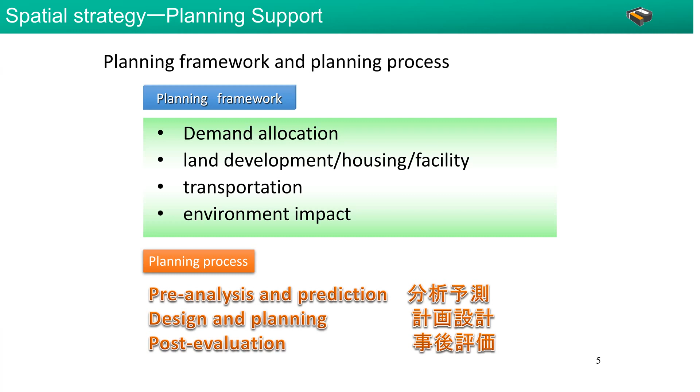My thinking for urban simulation is like in Japan, where we call the planning process the planning framework. We start from economic demand allocation, then turn to land development, including housing and public facilities. Then people occupy the land parcels, and they will have transportation in urban areas, and they will cause some environmental issues.

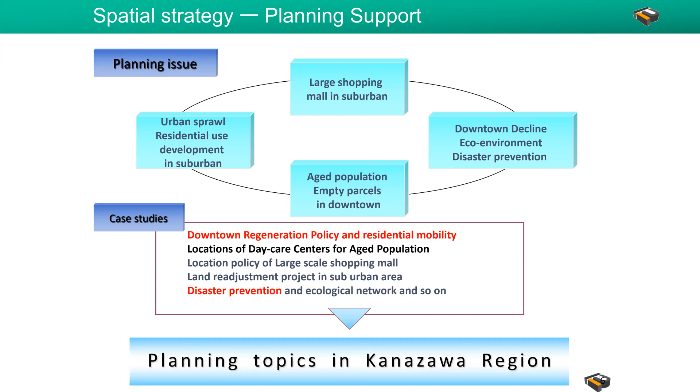In a local city in Japan, like Kanazawa City, they start from urban development - what we call urban sprawl - developing business areas outside in suburban areas. Then in the downtown, they will cause urban decline issues, with most population leaving downtown areas. So there's a process I show here: starting from urban sprawl and urban decline, and also downtown revitalization - this is quite an important topic.

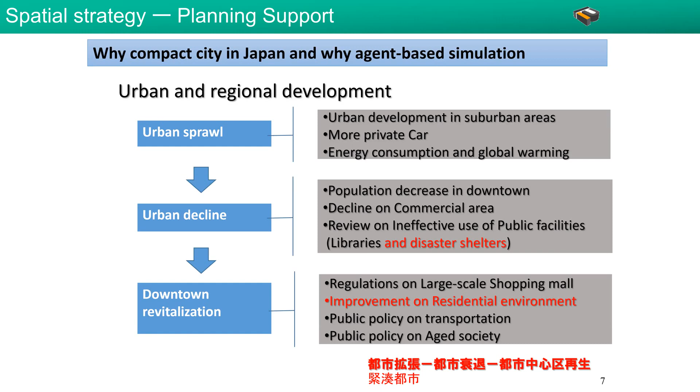I will introduce some urban planning and simulation work today. The first is a downtown regeneration policy. As I already introduced, development tends to develop residential use in suburban areas, and so the downtown tends to decline.

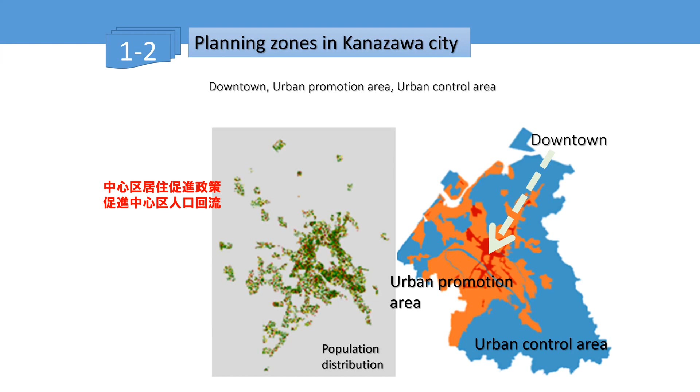That's the urban residence promotion policy. They have some subsidy programs for people who like to move from the suburban area to the downtown - the government pays some subsidies for the people who move. For this, as I introduced first, we consider our simulation from this perspective.

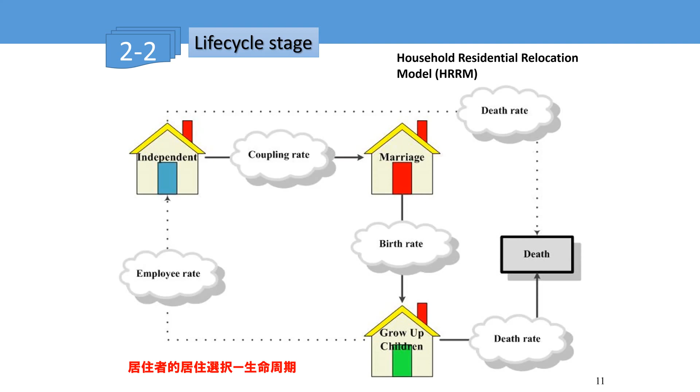Firstly, we consider the household relocation. We consider the life cycle stages for each household living in the downtown areas, to simulate when and under what conditions they will move between the suburban and downtown areas. Firstly we define the stage of the people who will consider relocation.

In Japan, we find there are four household ages where they're likely to consider relocation. First is around 20 years old, then they get married around 30, and probably have children, and as a bigger family they will move to a bigger house. After the children become independent and the household becomes an aged person, there's probably another chance to consider relocation.

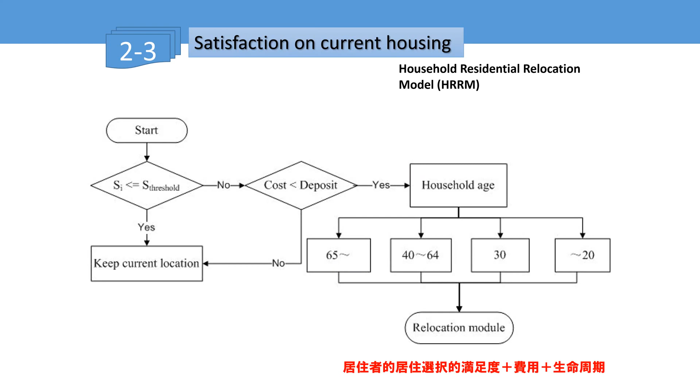So in these four stages, it's possible for the household to use the urban residential promotion policy to move from suburban areas to downtown areas.

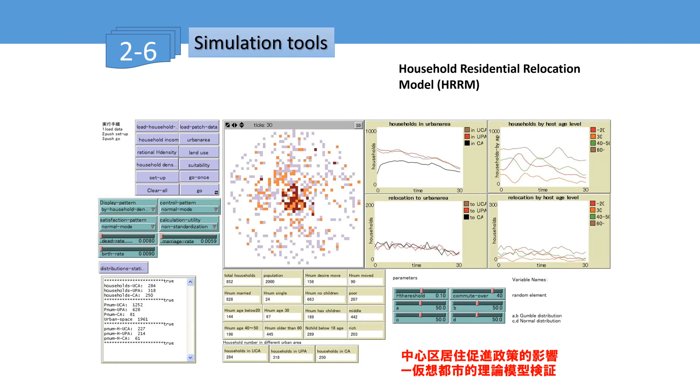This is some kind of simulation. We use the virtual city of Kanazawa and simulate the urban policy and urban conditions within the simulation system, simulating how people move from the suburban areas to downtown.

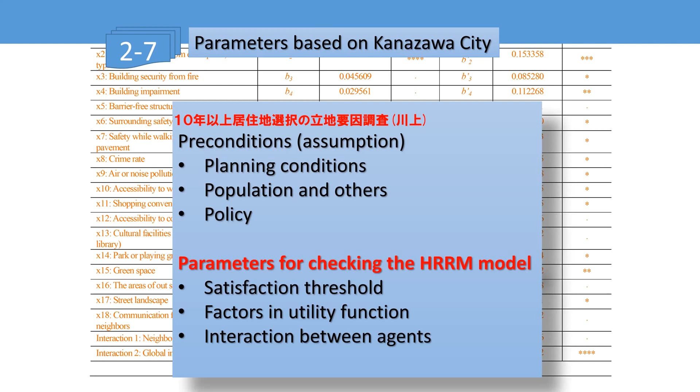For people who will choose downtown as their relocation area, we made more than 10 years of investigation to check the impact factors for relocation behaviors. In the background of this slide, you can see a lot of factors we collected from the questionnaire in Kanazawa city.

This is an example of our simulation work. We developed a system where the right side is for decision-making meetings, with a server side. The mayor will use the server side, and different departments of government will use the client side, meaning the residential bureau, transportation department, or other organizations in the city. The client can choose their own policies, and the mayor can check the comprehensive simulated result of all proposed policies by each department, then make the final decision on local city policies.

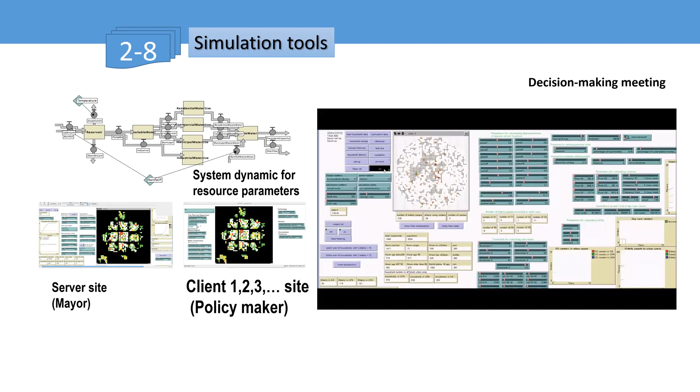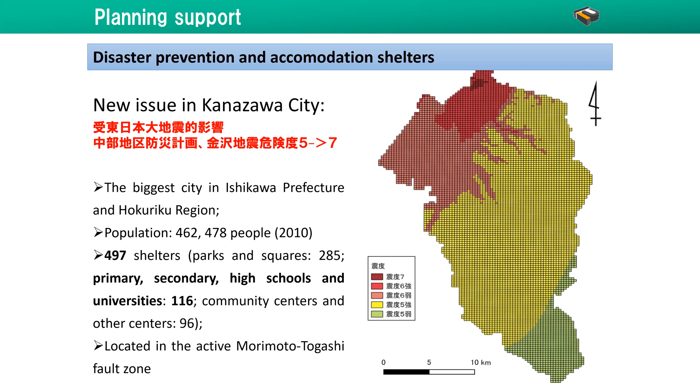Another topic is about disaster prevention and accommodation shelters. In Japan, there are a lot of disasters, including earthquakes. As you can see here, this map shows the degrees of the earthquakes. We simulate which buildings will be damaged and which roads will be blockaded when an earthquake takes place, and simulate the evacuation behavior to find how evacuees will find accommodation shelters.

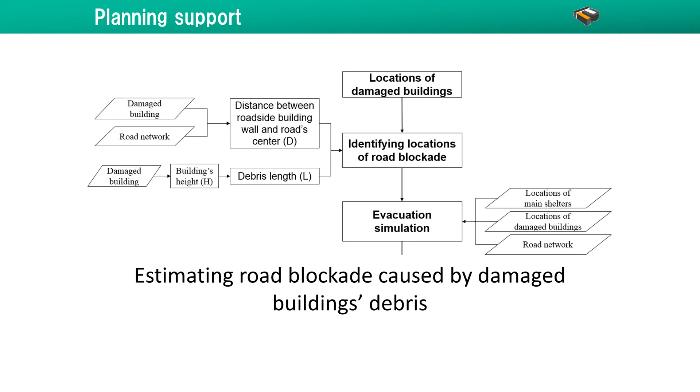This is the GIS data we use for the simulations, including building data and road network data. We can simulate which buildings will be damaged during the earthquake and calculate how many people will leave the damaged houses to the accommodation shelters. When people find the evacuation route, they cannot use roads blockaded by the earthquake and debris from buildings.

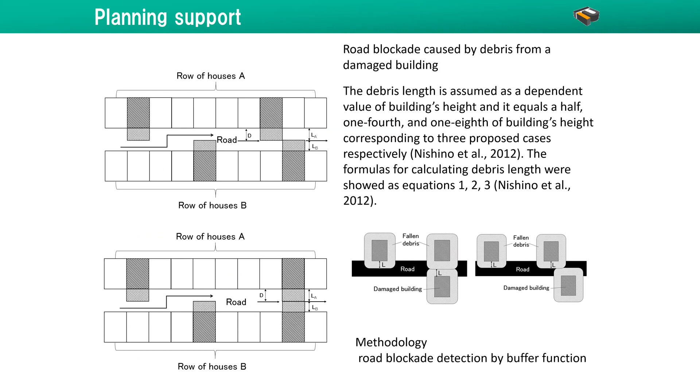So using this methodology, we simulated how the roads will be blocked during the earthquake, and finally we get results like this. You can see the yellow star marks are accommodation shelters, and the green points mean damaged buildings. The evacuees will escape from the buildings and choose the red road network as the evacuation route to the star marks, meaning accommodation shelters.

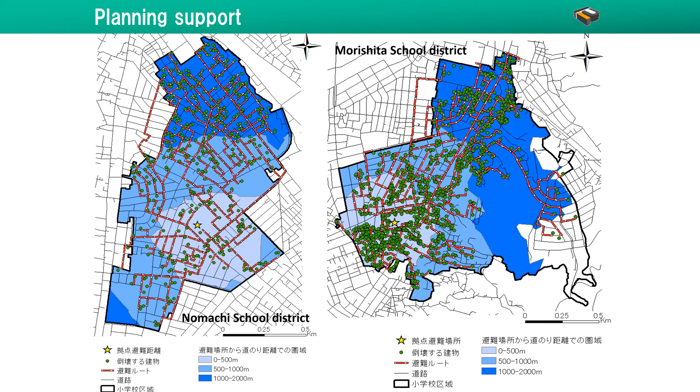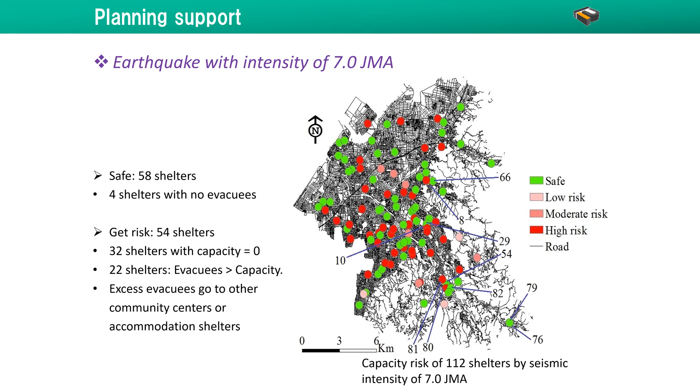Then we can summarize how many people will use the accommodation shelters. Because we have the capacity data of each accommodation, we can figure out which accommodation shelter is in a dangerous status, and the buildings that cause road blockades in this map. Finally, we understand which accommodation shelter is at risk and which is safe, meaning the number of evacuees will exceed the capacity of the accommodation shelters. That's the result of the simulation.

There are also two papers published in Natural Hazards Review and Disaster Situations. If you are interested, you can find these two channels for more information. So this is the urban simulation work.

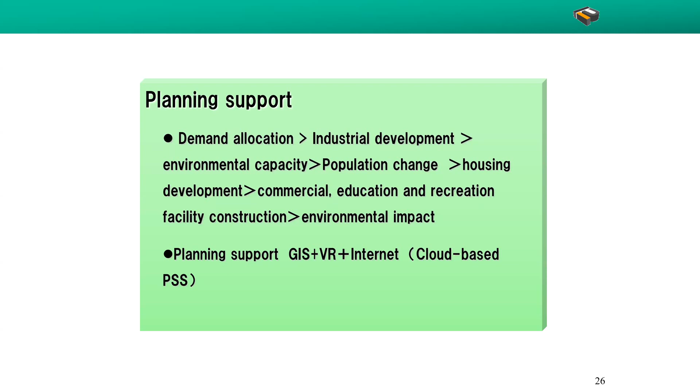Actually, we start by considering the economy of demand allocations, then consider where to develop housing, commercial, and public facilities. Then we can simulate the interaction between land use and transportation, and consider the environmental impact in the urbanization process. That's the overall consideration we are doing in the field of simulation work.

Now let's start the second part. The second part is about urban design. This is also supported by Japanese government and local city governments.

We are interested in simulating urban planning regulations. We have developed a tool you can see here. This shows a building's possible stories, and we put in all the parameters of road regulation and planning regulation in law, and simulate how the regulation will look, and how the planning regulation will impact the building strength.

This is very useful for public participation. We also have a tool to invite people to design public parks in their communities. For this kind of work, we use virtual reality to support the planning.

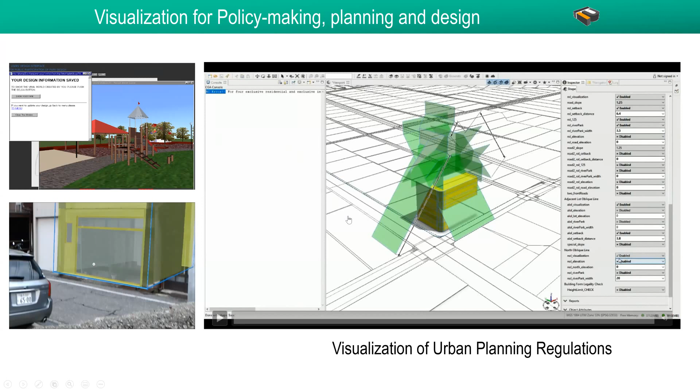Urban design work is also used to simulate the house. In this case, the government would like to build a pedestrian bridge, and we find a solution for the transportation traffic jam by dividing the people and cars into different levels.

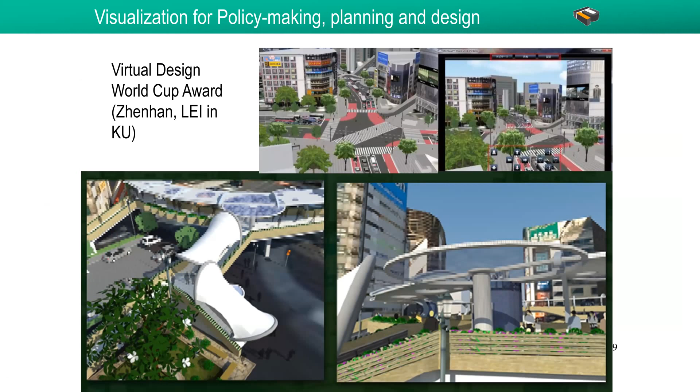We simulated the effect of the pedestrian bridge design to find if the traffic jam problem can be solved by this design. So we simulated the amount of cars and also the number of people at the crossroad based on real data.

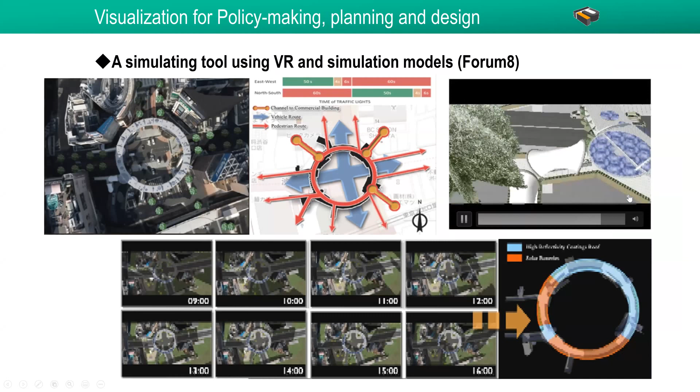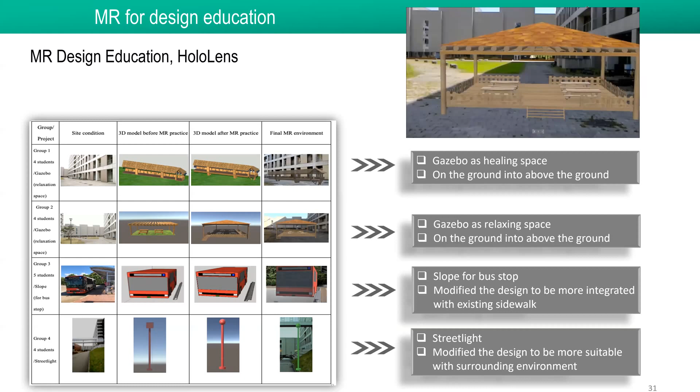We have also used MR, mixed reality design, to support the real site design, like our campus, to make it better.

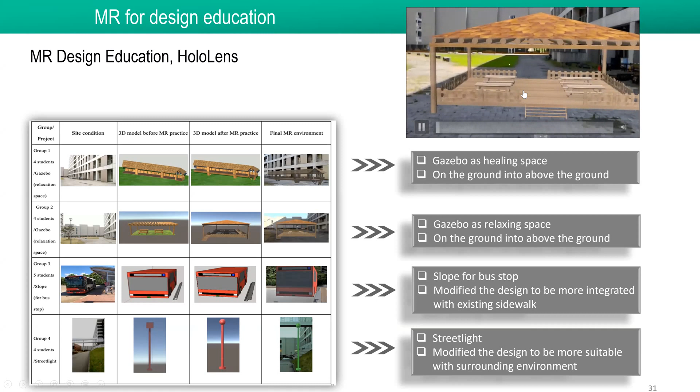Design. We also publish several publications of our urban design work using virtual realities. If you are interested, you can find a paper. I introduced this in the beginning.

We start from human behavior, and then we turn to design and construction. So the final topic is about smart city construction. In Japan, it's very important to reach the aim of the zero energy house issued by the Japanese government. For this kind of research, we have 4 steps.

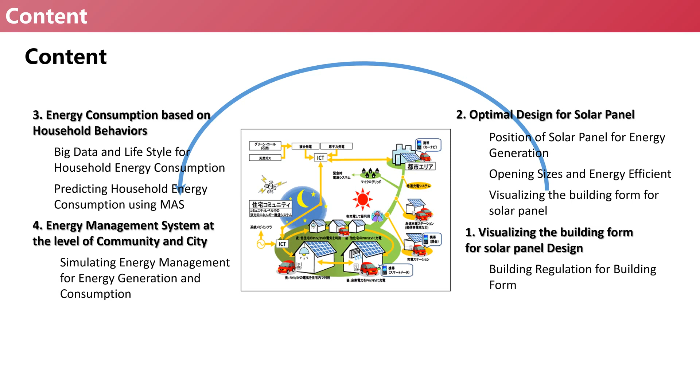One is to simulate the building form based on land regulation, design the solar panel, and find the solution of energy consumption based on human behavior. Then we consider the energy management in the entire cities and communities. Let's go through fast - that's the main concept of smart city construction in Japan.

It's like this: the home energy management system. For each detached house, HEMS - we call it HEMS - can be installed. Then the people can use the generated solar electricity power by the solar panel.

It's possible they can also sell the generated electricity power to the urban facilities, and keep the balance of selling and generation of electricity powers. So to keep the balance, we call it the zero energy house. It's a little complicated concept.

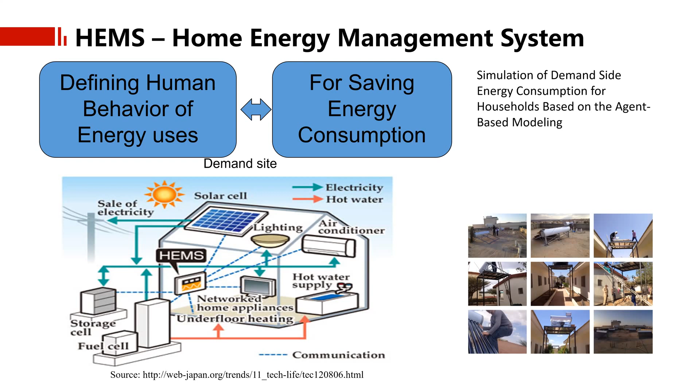It's for the Japanese government to use HEMS for zero energy house construction. This work will simulate how much the building can generate electricity power in the entire year by each month. We simulate how many years the solar panel can be used, and how much electricity power can be generated by the solar panels.

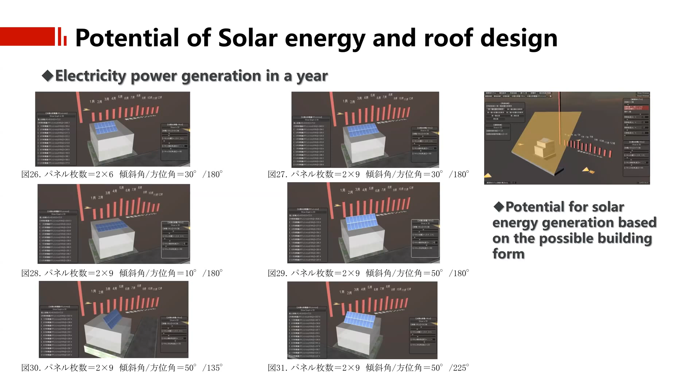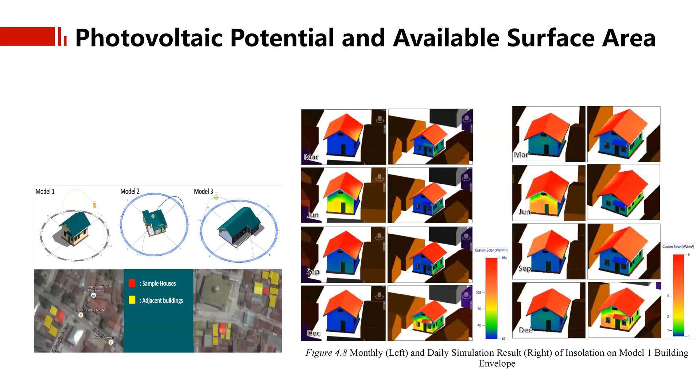We also simulated the reflection from surrounding buildings to consider which wall is possible to install the solar panel. This is some kind of simulation for considering daylighting for energy saving.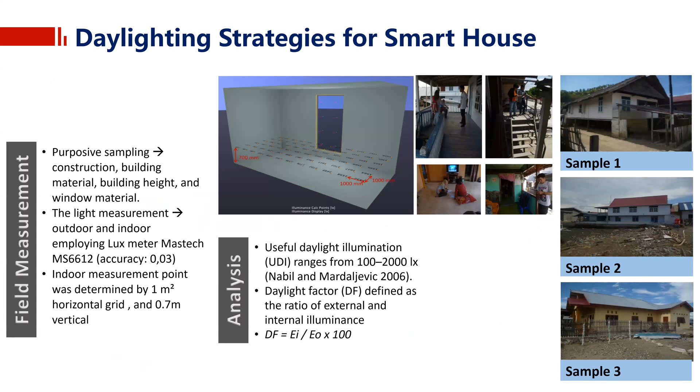This is some simulation work we are doing. We consider the opening size, I mean the window, that can use daylighting, and then we can turn off the light if the daylighting from outside is enough. This is possible for energy saving.

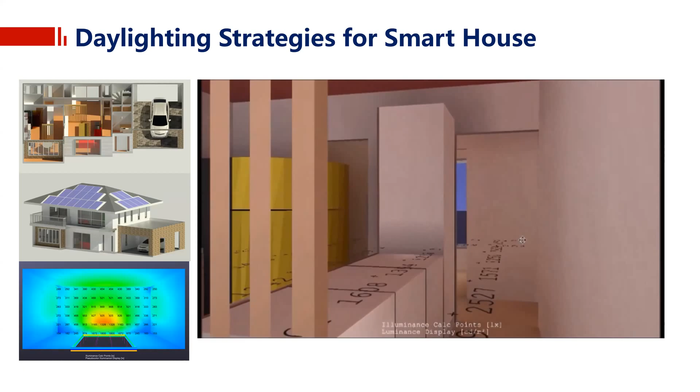We also simulate all the houses in the communities and try to keep the balance - how to keep the balance of the generation of electricity powers by the solar panels, so they can offset the amount they buy from facilities in the cities, keeping the balance of buying and selling of energy electricity powers.

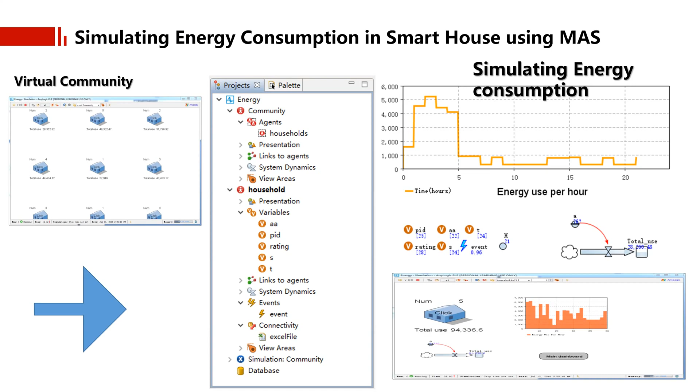My research supports policy making, planning and design. We use GIS technology and virtual reality technologies. The reason I designed my topic as urban simulation for urban planning and design is that it also relates to environmental issues, and I hope this topic is related to the conference.